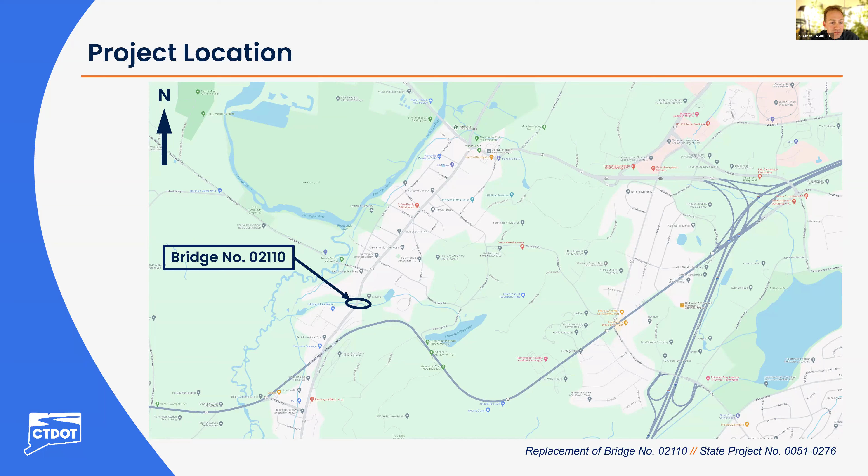The existing structure, Bridge 2110, was constructed in 1924. It's a 5.5 foot wide by 4 foot high reinforced concrete arch under approximately 15 feet of fill. It currently has reinforced concrete head walls and wing walls, a drainage outlet adjacent to the northwest wing wall, and a drainage swale along the southeast embankment.

Looking along Route 10 on the left, we have looking south across the culvert. You'll see here in the center of the roadway there's significant patching done to this particular spot. That's the exact location where the culvert crosses Route 10. There's a depression there due to some material washing through the top of the culvert, which I'll explain on the next couple slides. To the right here, this is looking north. Again, you can see the patch in the roadway to locate where the culvert is in relation to the roadway.

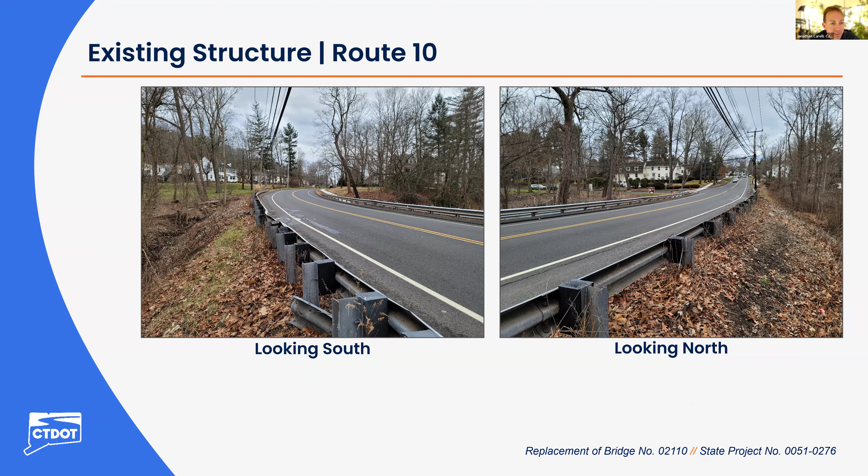The existing structure, as I mentioned, is a reinforced concrete arch culvert. It goes through the full width of Route 10. There's a drainage end wall and swale along the southeast section of the culvert, which provides outlet drainage to Route 10. And then one 4.5 foot sidewalk along the west edge of roadway that's depressed and separated from the current roadway.

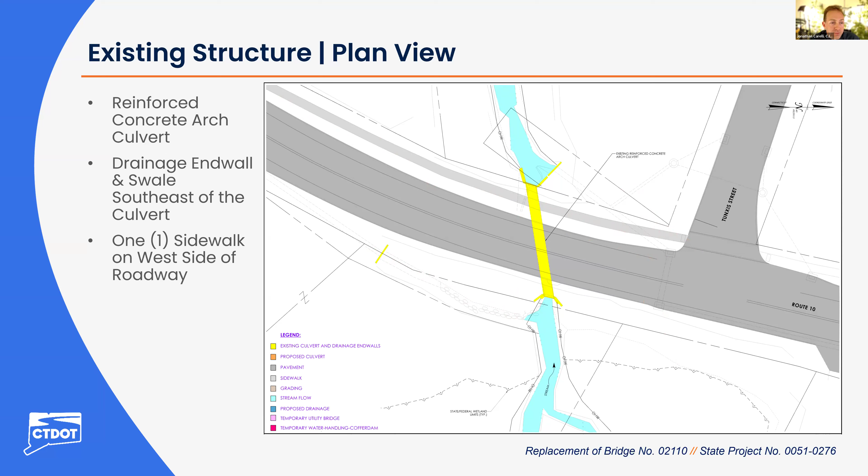So the purpose of this project is to address the existing structural and hydraulic deficiencies of the culvert by complete culvert replacement. The existing culvert is currently rated a 4, or in poor condition.

There's been several maintenance projects done in 2022 to increase the rating from a 2 to a 4 that involve patching in the roadway, installation of additional concrete within the arch culvert, improvement of the embankment with riprap, and other items.

This culvert itself is also very much undersized for the design storm. So this is the second part of the purpose and need, to address the hydraulic deficiencies. Any replacement would be more than adequate for the particular design storm that we have to design for.

So the proposed replacement at this site is a precast concrete box culvert. It will be longer than the existing culvert. This will allow us to improve the embankment slopes on all sides, reducing the need for maintenance of them. In doing so, we'll also eliminate the drainage swale and provide an extension of existing drainage through the new southeast wing wall. There will also be a new sidewalk placed within the project limits along the east edge of roadway to provide additional pedestrian accessibility.

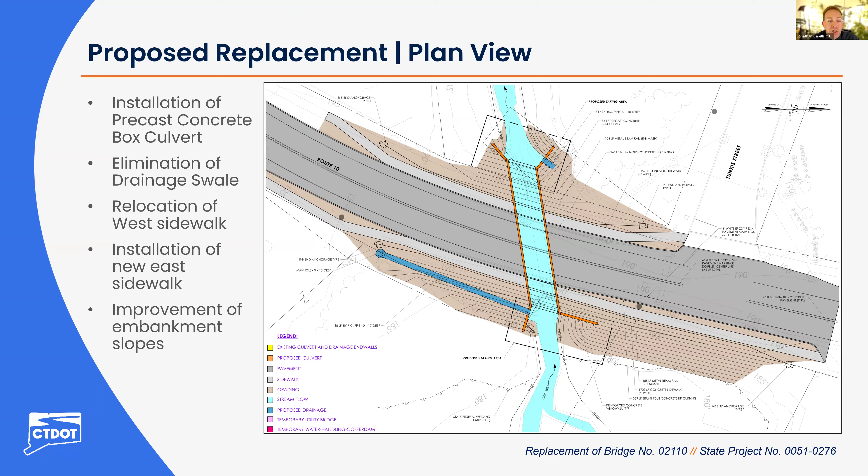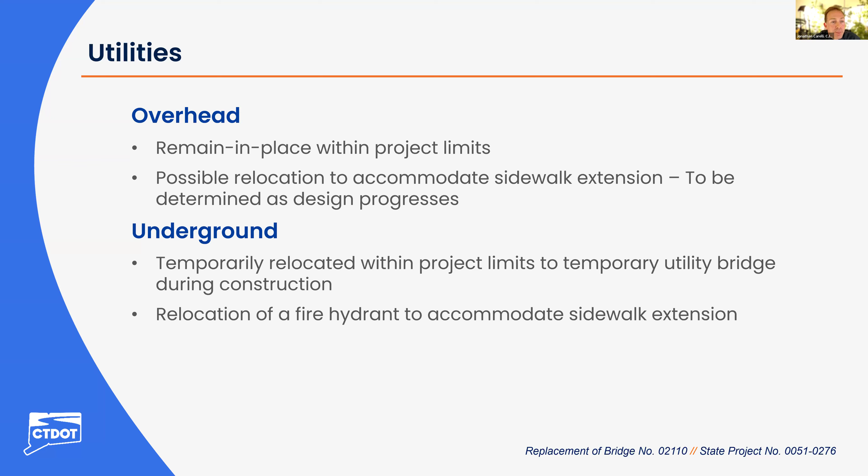For this project, we would be looking at two primary environmental permits: the U.S. Army Corps of Engineers General Permit 19, also known as the self-verification form, and a Connecticut DEEP General Permit for water resource construction activities.

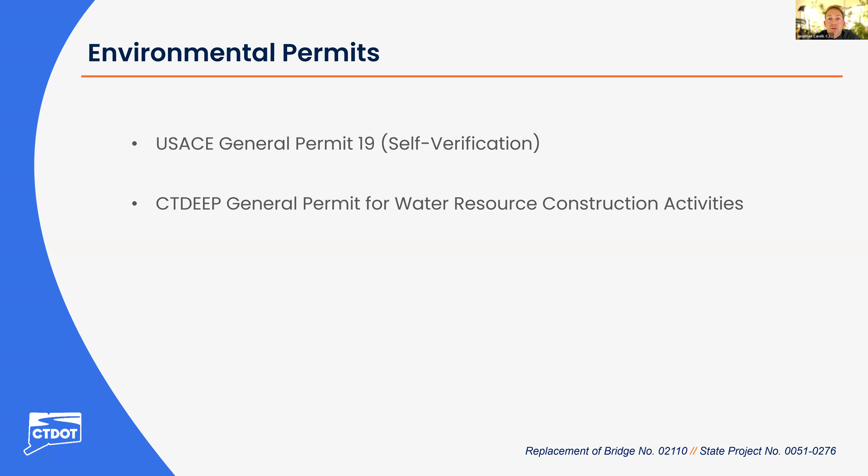There are numerous rights-of-way associated with this project, both existing and proposed. It's important to note that the existing state's right-of-way lines are noted here in red.

For existing rights-of-way, there are two drainage rights-of-way, both associated with those end walls mentioned previously: here in blue in the northwest quadrant for the drainage outlet, and in the southeast quadrant where the drainage swale was, or is proposed to be filled in.

As proposed under this project, a portion of the existing structure is actually outside the state's right of way. By installing a longer culvert, there is a need to both access and maintain the portions constructed outside the state's right of way at the inlet and outlet. It's the minimum amount of area needed to both access and maintain these facilities.

There'll be slope easements required for the improved embankment slopes, again just for maintenance. And then construction easements, shown here in orange, for the contractor to access the site and perform the work.

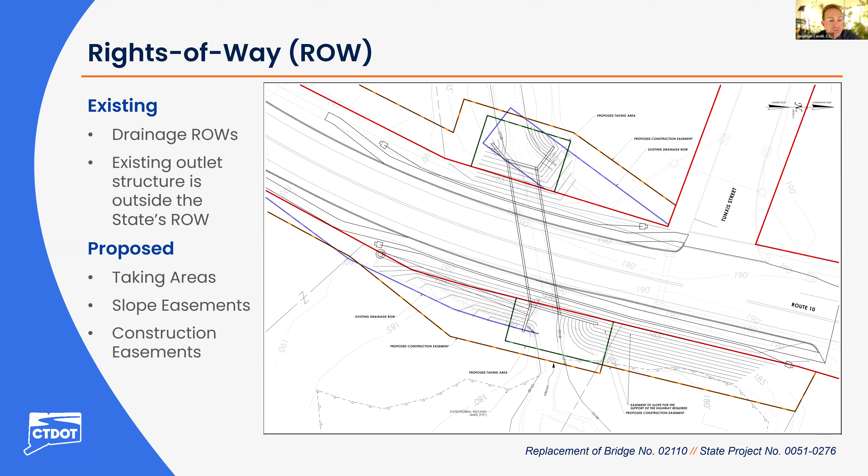Now I'll turn it over to Kathleen from Rights of Way, and she'll go through a little bit more regarding that. Thank you, John. So my name is Kathleen Erickson, and I'm an assistant project coordinator with the department's Division of Rights of Way.

Our office is responsible for acquiring property rights needed for transportation projects throughout the state. As John just mentioned, this project will require the acquisition of property rights.

I'll be giving you a brief overview of what our acquisition process looks like. Before I get further into that, I want to mention that the specific property impacts for this project are still being finalized and may change as the design progresses. Also, any required property rights will be acquired in accordance with Connecticut General Statutes Sections 13A-73 and 13A-98E, as well as the Uniform Act. If you go to the next slide, please.

Next, our office will determine the fair market value of those property rights, which will be used to establish an offer of just compensation. That offer will be sent out to the property owner in writing, and a right-of-way agent will be available to meet with the property owner to explain the project, their specific impacts to their property, as well as to go over the state's offer.

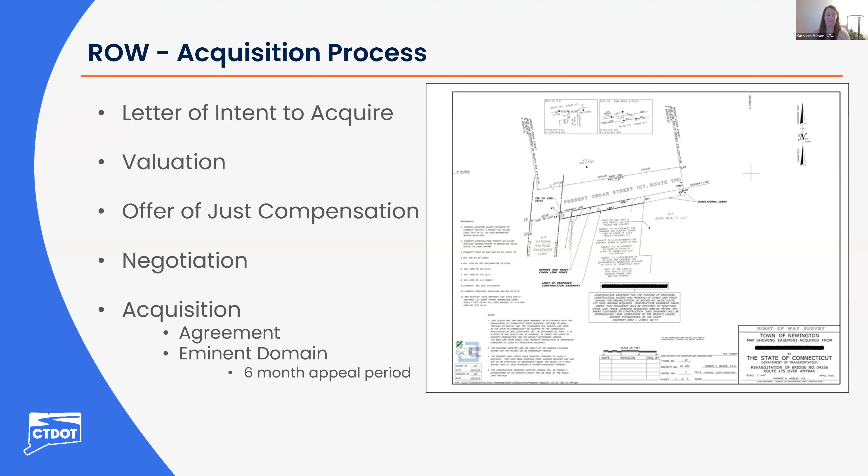To conclude the presentation, at this time we are anticipating construction to begin in the spring of 2027 and be completed by the fall of 2027. So it's what we call a one-season project.

We are currently estimating a construction cost of approximately $3,110,000, which will be paid with 80% federal and 20% state funds, and no funds are necessary from or required from the town. Please note that these are preliminary and subject to change.

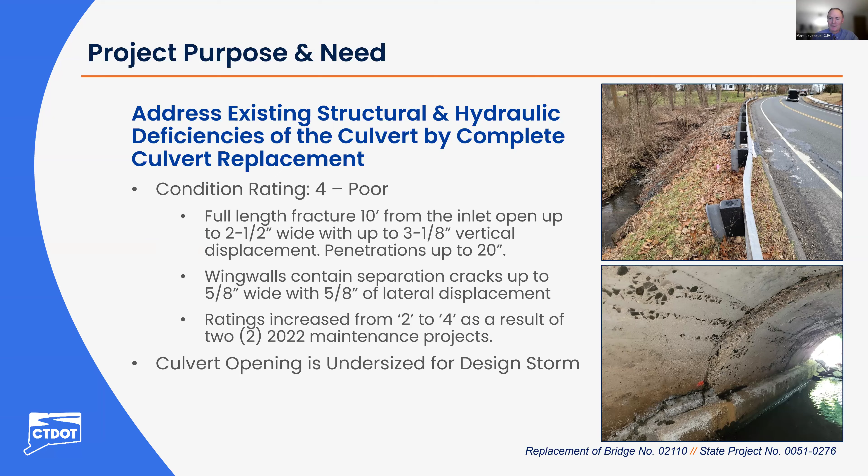Thanks. We did get another question. We are at 185 Main. For the proposed sidewalk on the east side, existing trees and other landscape will be disturbed. What are the plans for protecting or relocating the existing plants? I believe John Corelli from CGM will answer that. John.

Thank you, Mark. As far as protecting and relocating existing plants, any areas disturbed by the contractor are typically treated for invasive species. The department is looking to incorporate a landscape planting plan as part of addressing any areas that are disturbed. If you have any particular plants you have concerns about, I would ask you to reach out by email, provide your information, and state your specific concerns, and we can look into that more precisely. But generally, any area that's disturbed, we tend to restore either with specific plantings as dictated by the department, or typical turf establishment, so you're provided back with a quality treatment afterwards.

And I would like to add that we have a landscaping design unit, and usually they'll review the plans and provide any specific planting that fits the area to replace what was existing that we had to remove, or protect trees that need protection during construction. We'll do that as well.

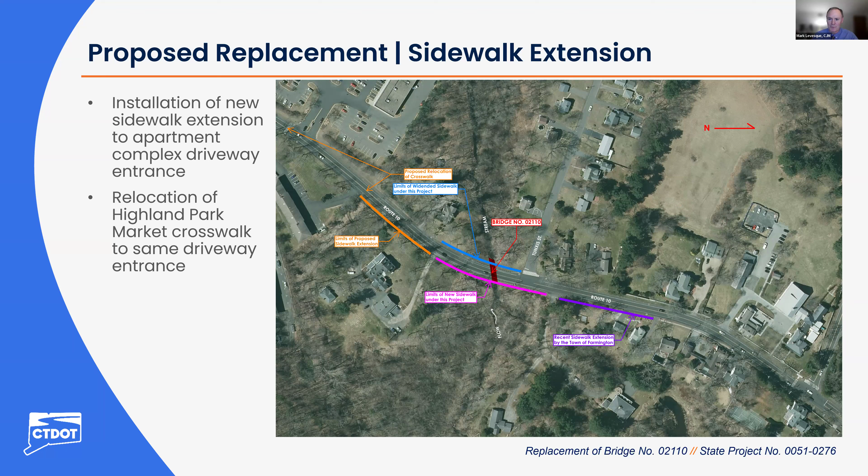So the existing culvert is severely undersized for the amount of water that flows to the site. We designed it for various design storms. I believe this one, because it's considered a small stream, it's a 50-year design storm that we design it to. It's going to be a larger hydraulic opening. So what that means is the velocities will actually decrease when the storms come through that structure, and there won't be as much of what we call pressure flow, where it just builds up on one side and rips through the culvert.

For the downstream properties, through our hydraulic design, it's supposed to converge, meaning go back to what it was before, as soon as possible downstream. So there will not be increases in flows to private property or anything like that. And we have a hydraulic engineer helping us size the proposed culvert.

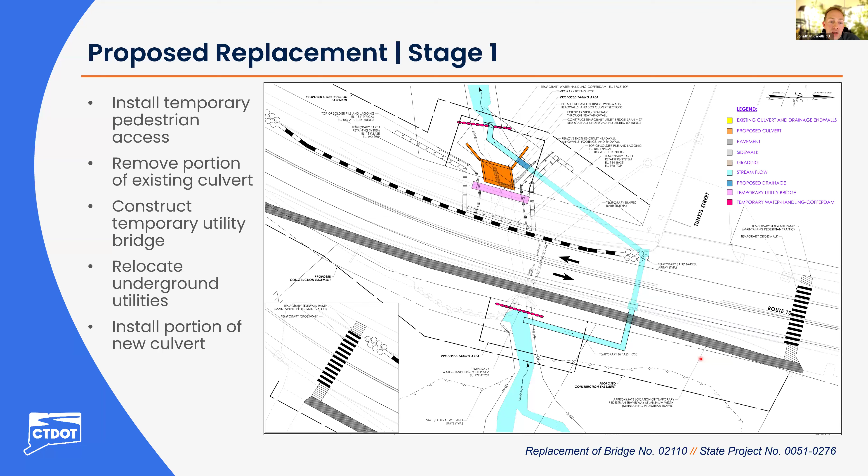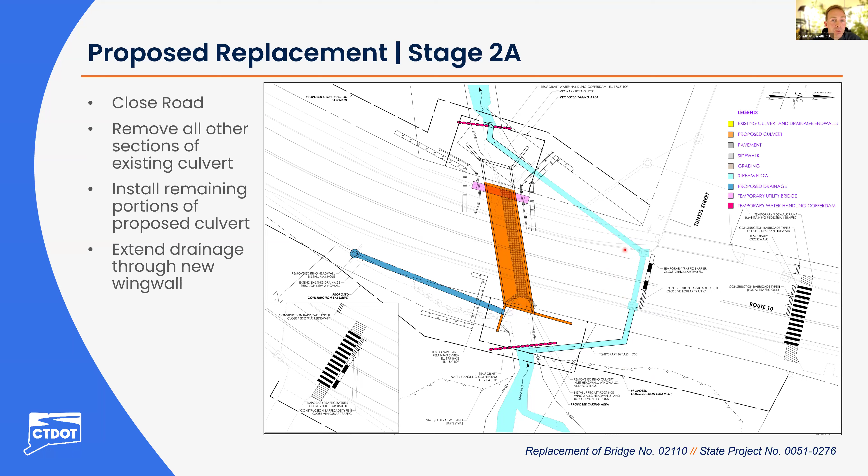The previous question was whether people will be able to walk from Tunxis Street side to the Highland Park Market once the road is closed to traffic. During the pre-stage where traffic is shifted, there will also be temporary pedestrian access across the street from Tunxis Street, providing access through the project limits. However, once we enter stage 2, where the roadway is closed, the contractor will have to utilize the entire work area to do the deep excavation to remove the existing culvert and install the proposed culvert. We're looking at a total excavation of 15 to 25 feet throughout the project limits, so it would be impossible to keep access for pedestrians and vehicles during that stage, which is why we're limiting it to 1 to 2 weeks. Once that work is complete, the new sidewalk will provide access on the east side of the roadway for stage 3.

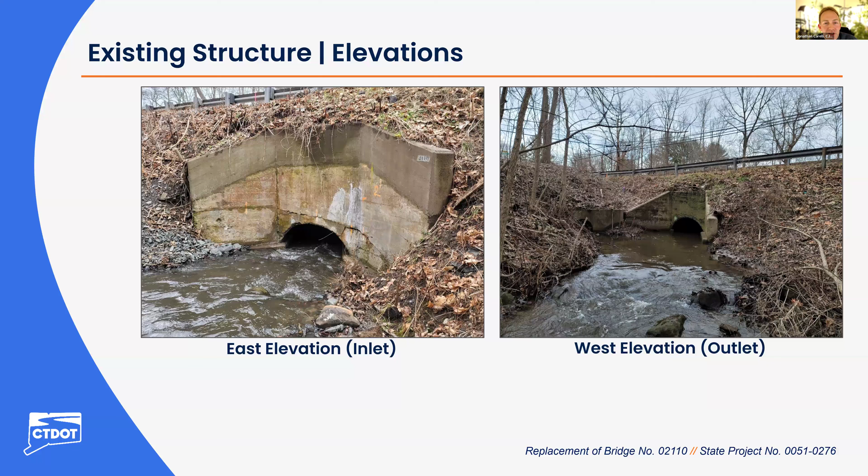Yes, the new culvert will be bigger. The existing one is 5.5 feet by 4 feet high, so very, very small as it is, especially with the flow height. The proposed culvert is 14 feet wide by 7 feet high, so it will be significantly bigger and significantly taller than the existing one.

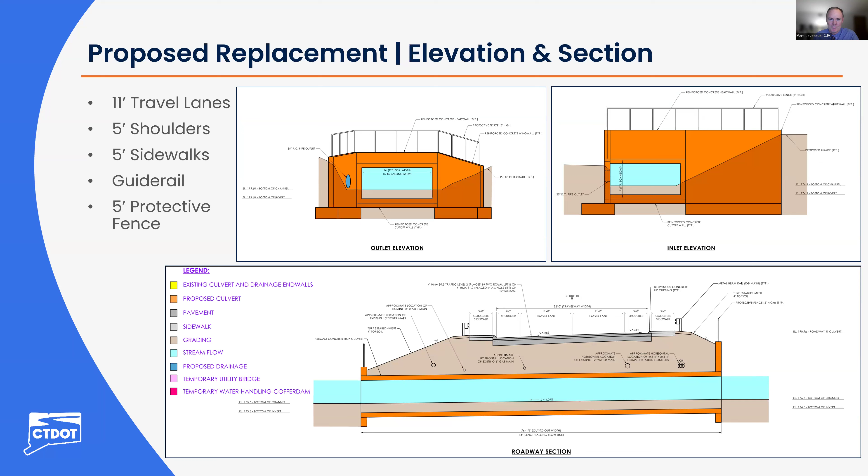Did get another question. There have been times where beavers have blocked the entrance so that property on the east side has been flooded. Should this help, correct?

Yes, it should help. I don't know that we've ever been able to completely stop beavers from doing their work. This will be a much larger channel for them at the bridge site to build a dam across. I've seen them build some pretty impressive dams before, so if they're building it right at the culvert, yes, it will be an improvement. If they're doing it upstream or downstream, those conditions aren't really going to change. Not sure if anyone else has anything to add to that.